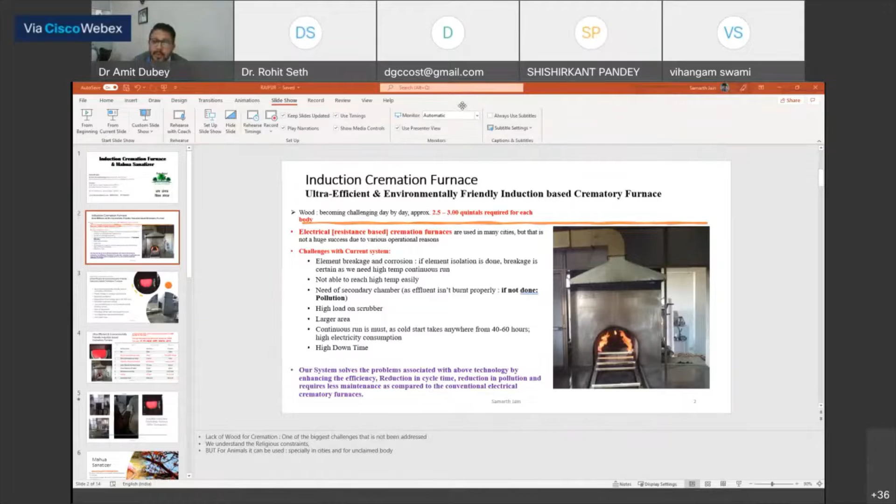Apart from that, as we know, Samarth has been instrumental in the time of COVID for development of his Mahua based sanitizer, which is one of the leading examples of a technology indigenously developed. I would welcome Mr. Samarth Jain and would love to hear his presentation. Please, over to you, Samarth, for a presentation on the work being carried out by your organization.

Thank you for participation also. You have to unmute yourself. Unmute yourself, Samarth. We cannot hear you. Unmute yourself. I guess now it's okay. Yes, now it is okay. Can you hear me loud and clear? Yeah. Can you see the screen? Is it fine? Yes, we can see the screen. Please carry on. Okay.

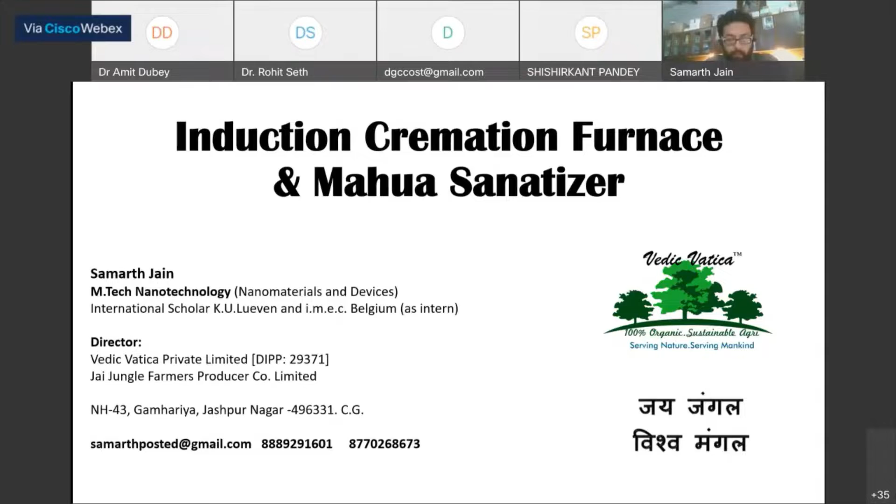So first of all, thank you, Dr. Amit, for giving me an opportunity to speak and present two of my works that I'm doing in Jashpur Nagar, Chhattisgarh. And my warm regards and good afternoon to all the scientists from the DST, State Council, and all the presenters. Basically, I'll be talking about the two projects that we are carrying out. One is specifically related to the minor forest produce, that's the Mahua, and second is the induction cremation furnaces. First, let me start with changing.

Well, about the induction cremation, we all know the wood is getting scarce day by day, and in fact, in our district of Jashpur also, out of 12 months, 3 to 4 months we need to bring wood for cremation from our nearby Ambikapur district. That's the harsh reality. And the alternate for this is the standard electrical resistance based cremation furnaces that we all know. As you can see in the screen, this type of furnace is being used to cremate the body. And it has been widely used, and specifically during the second wave, the government also promoted this, and many tenders were floated. Few were in Delhi, Agra, and 2 or 3 more places.

But as we are working very closely with heating systems and furnaces since the last 10, 12 years, that's my experience, and the team which we work with has experience of more than 30 years in the same. So we learned that there are a few major issues with the system that I would like to talk about first. Because when the body is being burned, be it human or animal, there are a lot of acids, bases, and other things that corrode the heating elements, because we are talking about the resistance-based element. At high temperature they are already vulnerable, and these types of chemicals are more reactive at temperatures of like 700, 800 degrees Celsius.

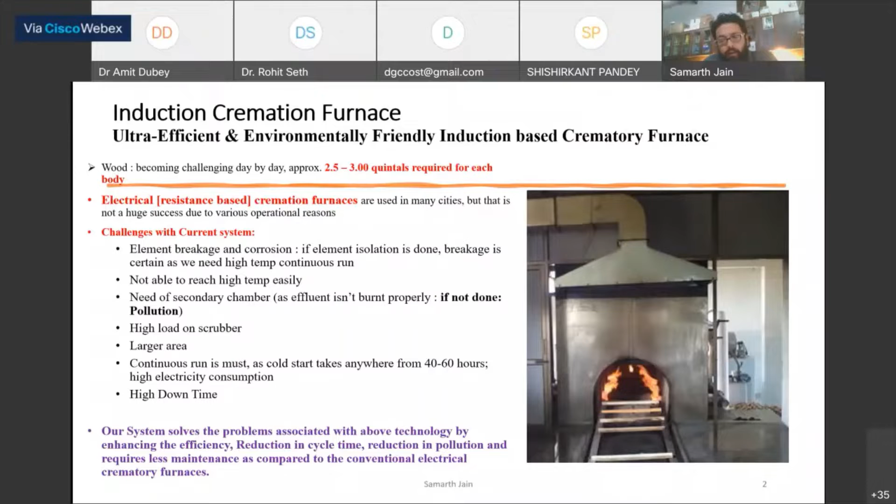So as you can see, in the resistance-based system the heaters are on the sides. If you can see the mouse pointer, usually heaters are on these sides, and it's being heated so that the temperature in the core area reaches like 800, 900 degrees. And you can see here there is very less insulation also.

And this is the steel chamber that we are using, and there is just a coupling of the induction system around it. So what we can sufficiently claim after testing around 200 plus cremations: this is the latest system that we are operating at Agra by Silhouette Rainbows. This is the induction-based system. Also, the size is very less, and I will give the comparative details in the next slide. So there is very high power saving, minimum pollution. It will be much easier if we see the comparative data.

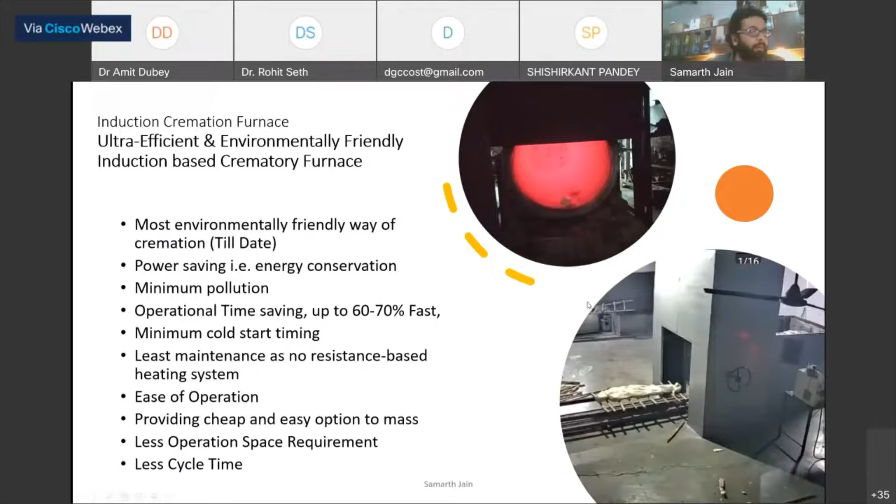So this is the data that we have achieved after 200 plus human body cremations at the test site located at Sri Kshetra Bajaja Committee, Tajganj, Agra, and all of the development work is being done at Silhouette Rainbows, Agra, and Vedic Vatika, Jashpur. So this is the comparison of heating mode. You can see the resistance-based system, and here is the induction-based system. The installed capacity in kilowatts required is higher, but energy consumption is reduced by more than 50%. Minimum, we used to get around 50 to 60 kilowatt for cremation per body, and here we are able to achieve that in 50%.

Also, the minimum time for resistance-based heating system cremation all over India is 2 to 3 hours, and ours is safely 1 hour. It's less than 1 hour, but for being on the safer side, we are saying 1 hour. Again, when we compare the cold start time to reach 800 degrees Celsius, resistance-based is 40 to 60 hours, and ours is maximum 3 hours, that too for 1100 degrees Celsius. When the body starts burning, the temperature automatically goes high. So after 800, you can simply put the body, and then it assists in increasing the temperature.

Again, the downtime is the most important thing, because if anything goes wrong with the system, the insulation is very good; we have to make the system so insulated that it keeps the heat for a longer duration of time. So for a resistance-based system, if something is wrong and you want to make any changes, it would take anywhere between 2 to 3 days so that the condition is workable inside the furnace. While in our system, it's only 3 hours. As you can see, there is a very thin layer of insulation, and then there are different gaps, and this is the whole system. I think I do have some images later on.

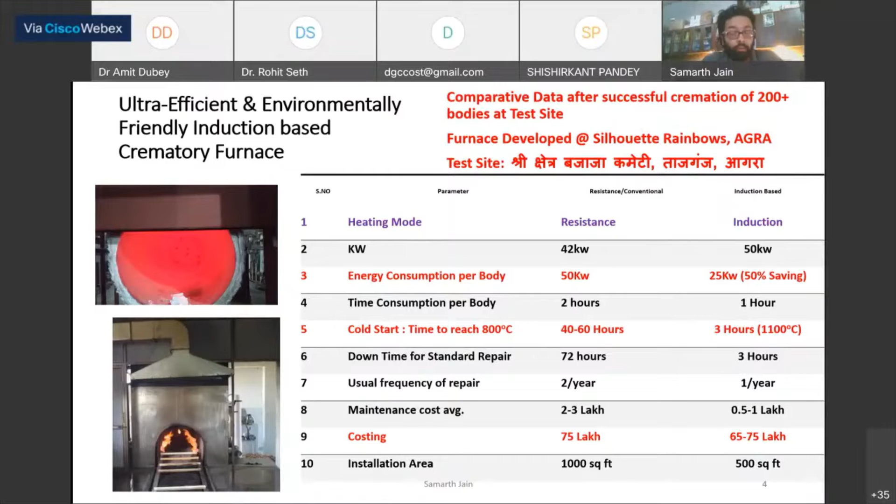So this is the main system that is running. You can see there is very less insulation. There are just 1 or 2 layers of insulating ceramics, that's all. This is the whole system. It's not very clear from this side, but this is our induction furnace, induction motor. This is our control panel. This is the chamber where we put in the body. This is a gate for closing, and you can see only one small pipe for passing off the effluent.

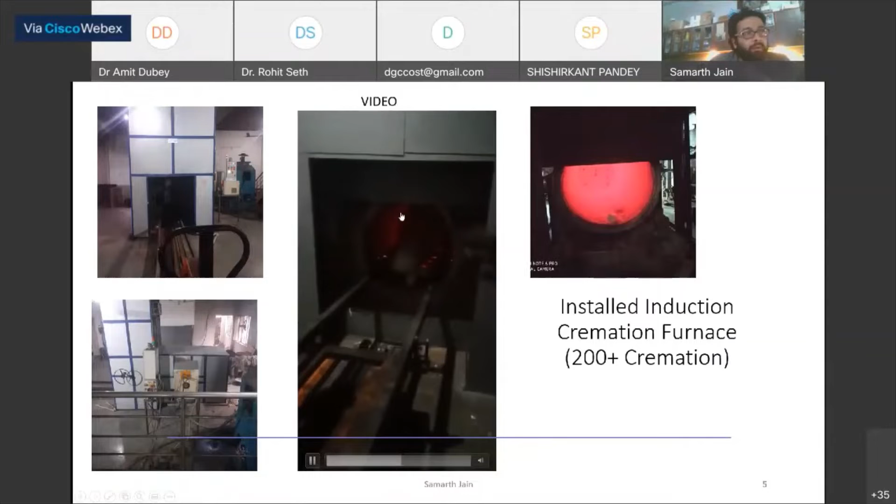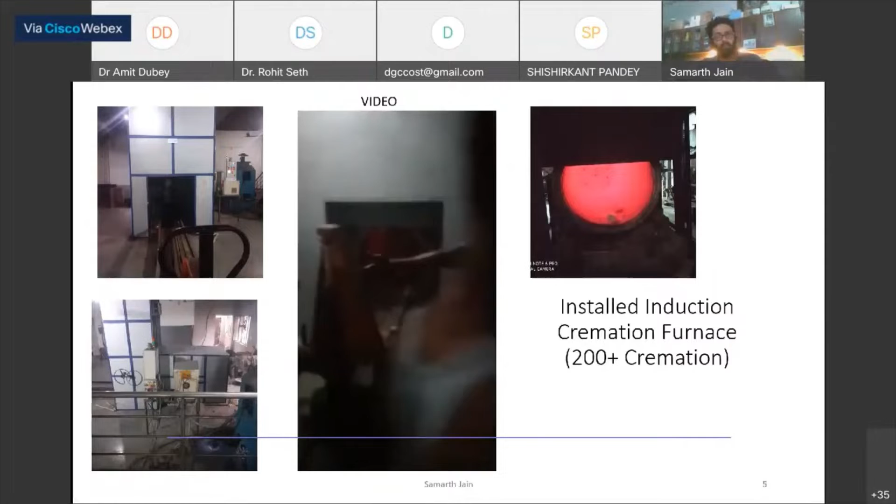The video is loading, but check if you can see. Yeah, this is one of the videos. You can see the red hot chamber, the glowing chamber that is made of stainless steel, and that assists us a lot, because we can achieve the temperature very easily in like 2 hours or so if we start from zero. So that's all specifically on the induction cremation system. If anyone has any questions, because I'm keeping it very short, I would be very happy to answer, or we can continue later on.

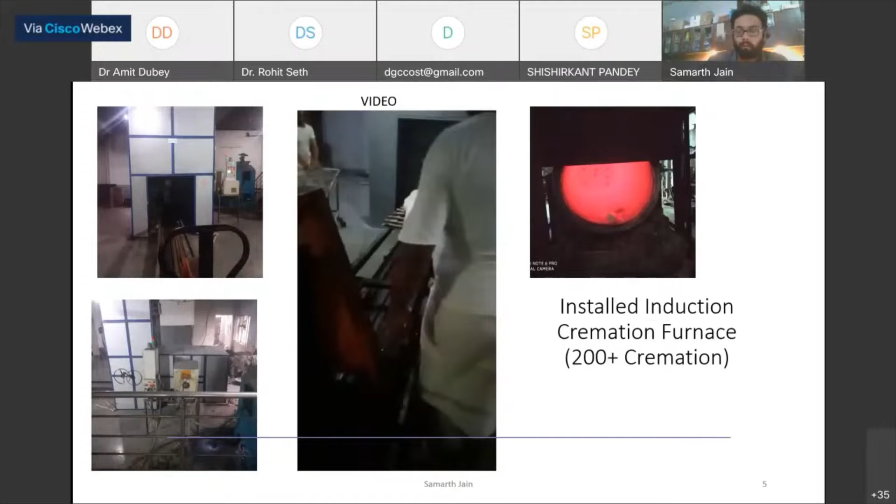Hello. Okay, so I will switch further.

Now coming to the work on the Mahua sanitizer that got a lot of hype, specifically in the time of Corona. Basically, I'm from the Jashpur region and it's too far away. The connectivity issues are a lot over here. There are no direct transports from any big cities, no railways, and no airports. So we are kind of secluded from the market chain. So there was an acute shortage of hand sanitizers. I'm also working as a free consultant with the Department of Forest, and sometimes we also work with the Van Dhan Kendra. So we came to know that there was a big issue of sanitizer, specifically for the police, CRPF and medical staff.

And also there were news coming of this sort that there is a skin disease happening, or cancer is spreading, by excessive use of isopropyl alcohol based sanitizers. And we all know from Ayurveda that Mahua is widely used to treat skin diseases, and the easily available material that I came across that has alcohol was Mahua, because it's being widely brewed and used by the local communities. So we thought of giving it a try at a very small lab that we have in

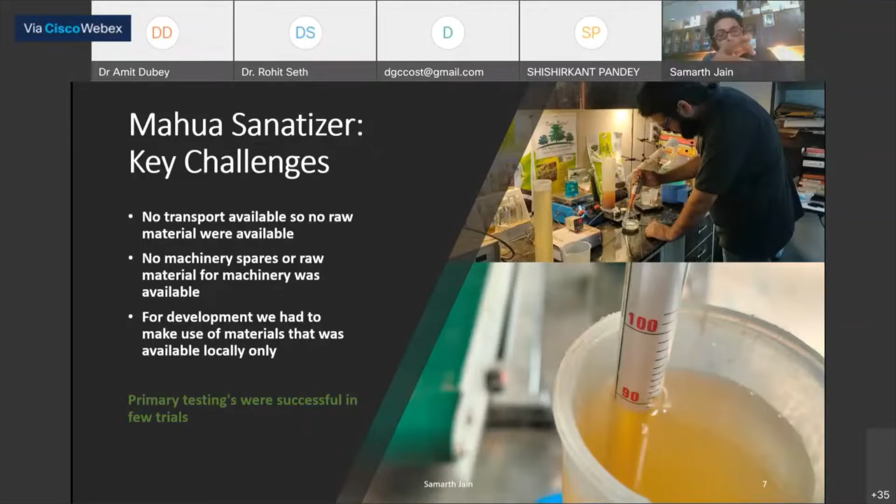our office. The main challenges, as we discussed, were that there was no transport material available, and no machine spares were available that we could purchase, because all the transports were down. And the best part about developing this sanitizer was that nothing from outside of our local town was used. As you can see, we were able to achieve easily 89-90% of the alcohol in our initial trials.

Again, after we were finalizing how the process flow will be and how we will run the system, another challenge that we faced was most of the labor that we have in our town was mostly uneducated, or they were from the tribal region. And another main issue was, because we were a private company, getting a license was a big issue. We cannot easily get the extraction license or excise license. Another issue was investment was required to build test systems.

So, because we were working closely with the DFO sir and the collector sir in our district, we had an unofficial agreement sort of thing that if it is being developed, they'll help and take over the system. In the images you can see, all these are the tribal women. She is filling the first batch of our sanitizer. This was the testing and training at our facility. And in the lower corner is the first system that we developed. It was of 80-liter capacity.

Yeah, so about the whole process, I will keep it brief, but basically what we do, the stock is fermented, that has Mahua, Ranu, Jaggery, and other indigenous

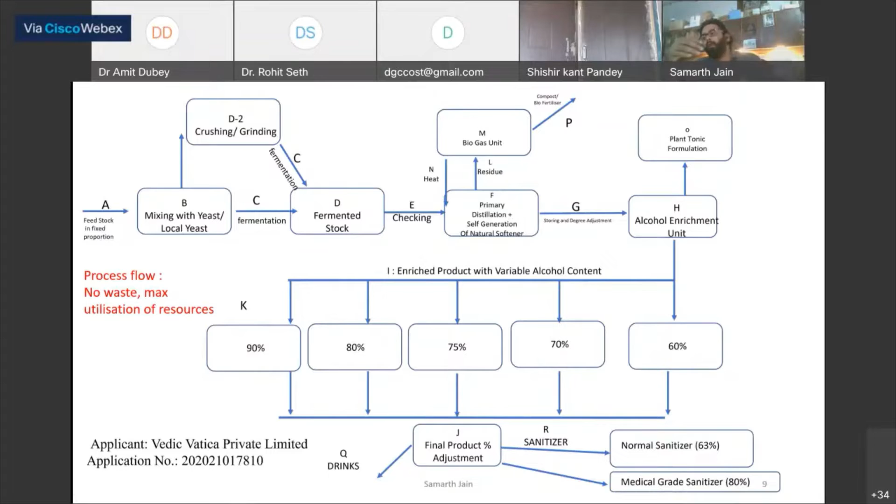We did get it checked from the food laboratories also, the residual after what is being fermented. Now, because after distillation, it's a very crude process, like desi technology it is. So there are different grades of alcohol that we achieve, I mean, the different refinement process of ethanol that we achieve in the system. That ranges anywhere from 20 degrees to the highest we were able to achieve, 40 degrees. So we need to enrich that. 20 is not enough for sanitizer, 40 is also not enough for sanitizer.

So this alcohol enrichment unit, what you see in the process H, was developed specifically by us for this purpose only. We feed in the material. There is a very short video I will share after this slide. So the primary distilled alcohol goes into the enrichment unit, and then it enriches it further. And the output we receive is starting from 90 degrees, it goes to 80, 75, 70, 60% of alcohol. So we store them in different containers, and then we adjust finally.

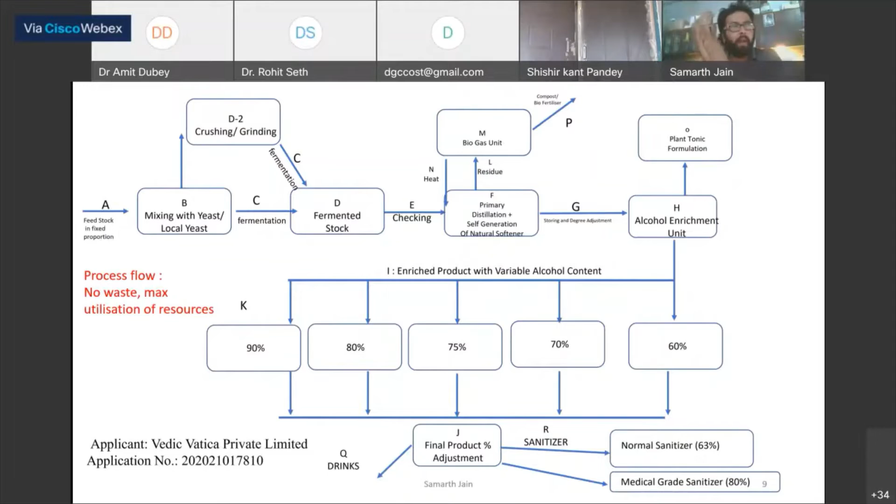Suppose if we have to get alcohol of around 70 degrees, what we'll do is we'll mix 60 and 80 or 60 and 90, and if the alcohol percentage is very less, around 40, we again put that back in the alcohol enrichment unit. Now the residue, I mean the waste that is removed from an alcohol enrichment unit, has around 5 to 10% of ethanol.

Although that can be used for making drinkables like RTDs, because we were using iron containers and those things, it was not feasible for us to achieve the license, so we tried to experiment with a plant tonic formulation, and it works very well for plant growth, specifically it assists in flowering. We have applied for the patent. For some reason, it was not considered novel, so it was rejected. But we have again applied for review. Some auditor from the electrical department is reviewing that also. I don't know why they have put it in the electrical department, but okay.

So normal sanitizer, what the US says, has 60 to 63% ethanol, but now the Government of India has increased it to 80%, and for medical grade it's somewhere around 80 to 95%. So we can easily achieve that using Mahua, and no other input materials are required from any big chemical factories or things like that.

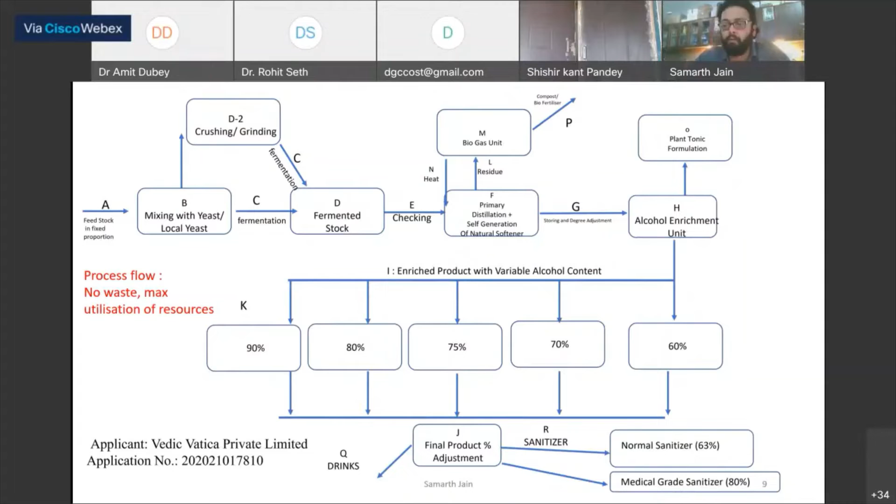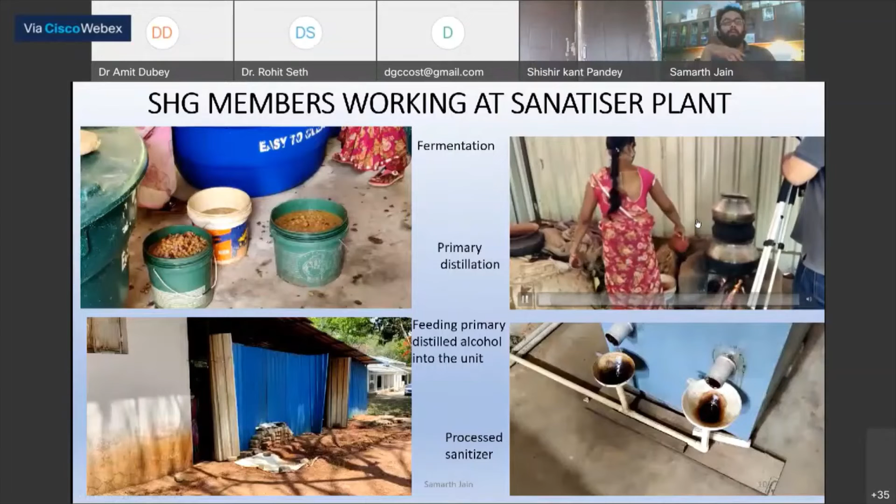This is the primary distillation where they use the traditional method. The essential oil is also being extracted by us using this method only, because we didn't have any different setup for that. You can see this part is empty now. There is a pot in which there is a secondary pot, and the pot is empty from behind.

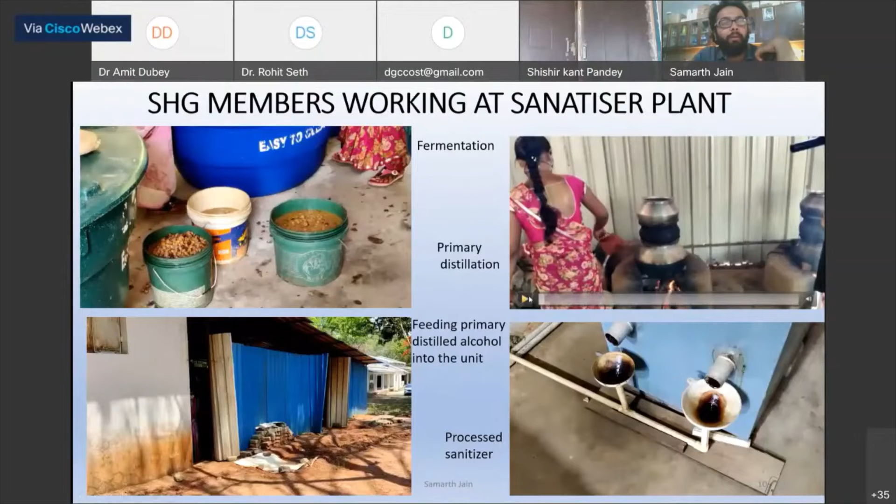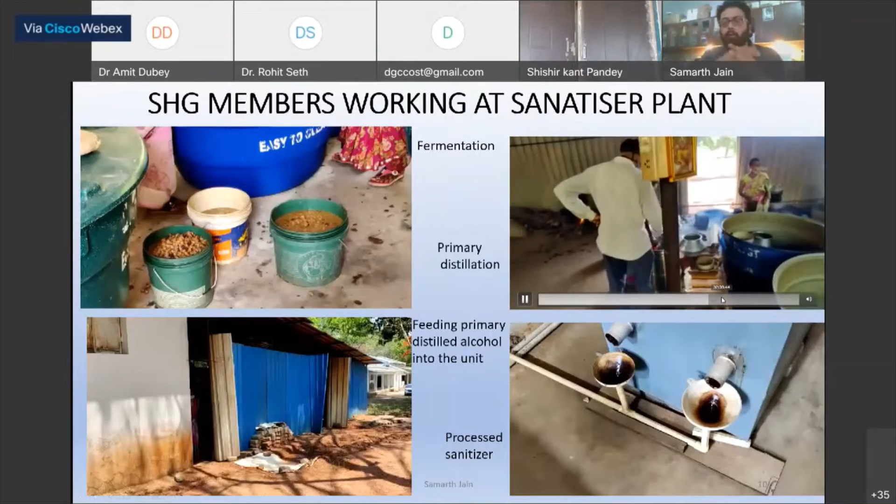So what happens is when you heat the system, the alcohol evaporates. Let me show you. There is another utensil that has cold water filled in. So when alcohol or any other vapor gets in touch with this, it acts as a cooling agent, and it drops into this pot. It's been used since ages. There's nothing new, but we try to keep it the same way so that we can give employment to maximum people.

Yeah, this is how villagers usually check how strong the alcohol or the mahua they have brewed is. If it's a blue flame with very little yellow flame and it burns off completely, the alcohol is good. So that's how we kept the system. But before feeding into the machinery, we did check with the alcohol meter. Maybe in this one we can see.

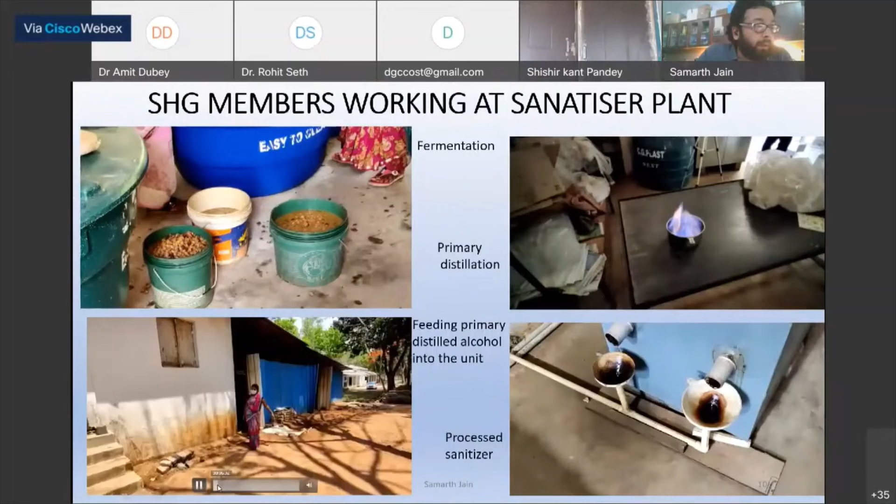Yeah, the material is being transported from the primary distillation hub, and now they are checking how much alcohol it contains. And after this, it's being fed into the tank. This tank has been joined with our larger system of 700 liter capacity.

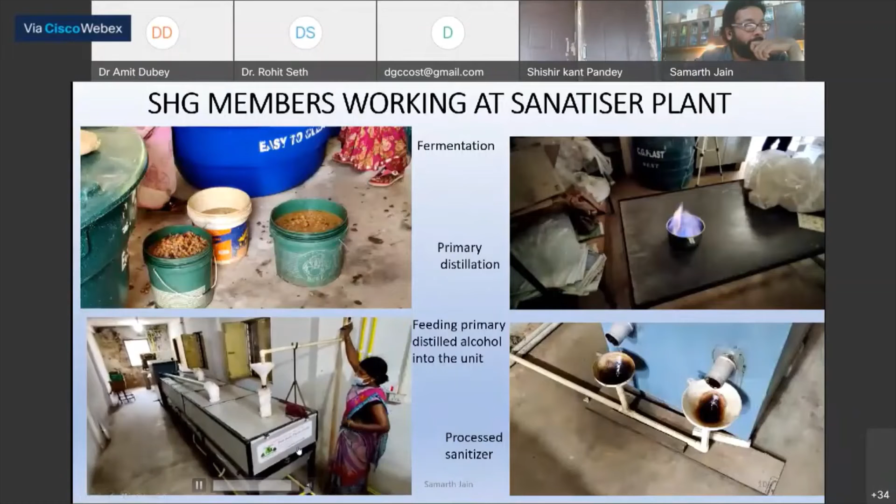You can see the pipeline. She will be feeding the material in. In this way, we were also able to minimize the risk associated with the high temperature furnace and the alcohol that has been kept. So we have kept the distance as far as possible. This is the loading part now.

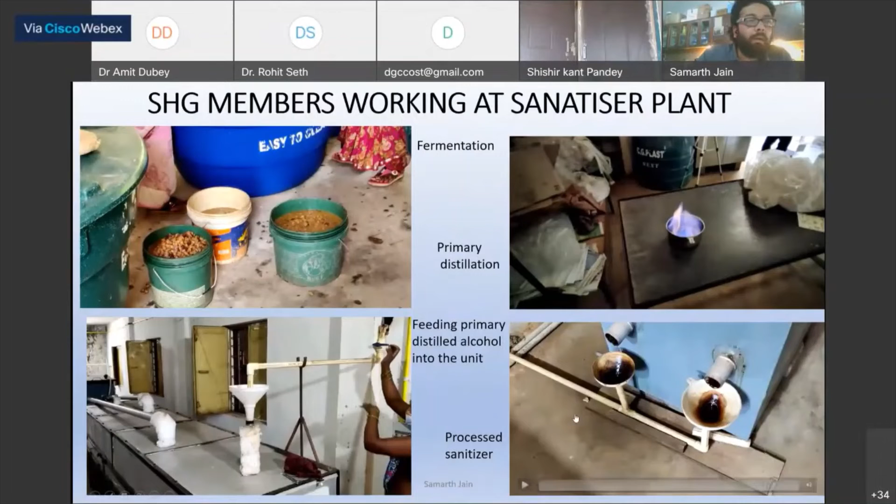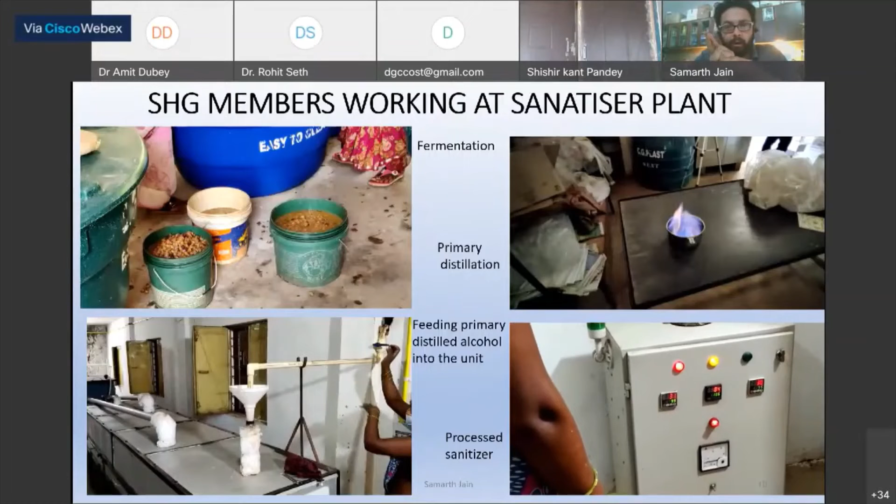So Mahua was fed in here, the primary distillation system. This is our control panel. When we start the system, there are heating pads all below the system and also on the corners, so it heats up the system. The best part is that our heat loss control efficiency is very high. So even if the system is around 100, 110, you can easily touch the system and stand by the side. There is no issue with that.

Once it's heated, the vapor flows from these two big pipes you can see. This is the chamber, these two pipes. This is the condensation chamber, which has the water and coolant in it. And here we can see the high degree percentage alcohol coming up. Again, because there was risk, we put the system in such a way that the alcohol being generated is shifted to another room.

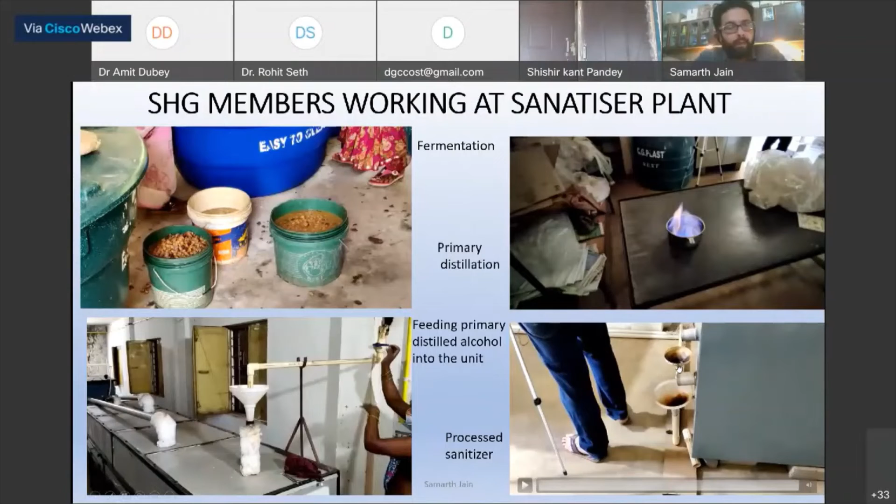So this is the whole team that operates the system, does the packaging and sells it to the government. The sanitizer is being sold by the trade name of Chhattisgarh Herbal, and they are also proud members of the Jai Jungle Farmers Producer Company that we have formed very recently, and we are working on various other products like that.

So a few achievements, keeping it short: no chemicals were used, everything natural is used. The most innovative part was that every sanitizer you must have seen has to use either glycol or glycerin or aloe vera for keeping the hands soft. Because Mahua has an inherent property for skin conditioning, even the alcohol that we obtained from Mahua had a sort of natural glycol, so we don't have to use a softener, even in Mahua sanitizer with an alcohol content of around 90 degrees. So that was one of the good things.

Another is there is no wastage. Everything is being used. Our system is so easy that among all these women, only two of them can read and write easily, the Adhyaksha and the Sachiv. Other than that, they can't even write, but they are manufacturing this. Till date, and this is data of 4 months back, they have achieved a turnover of 60 lakh plus.

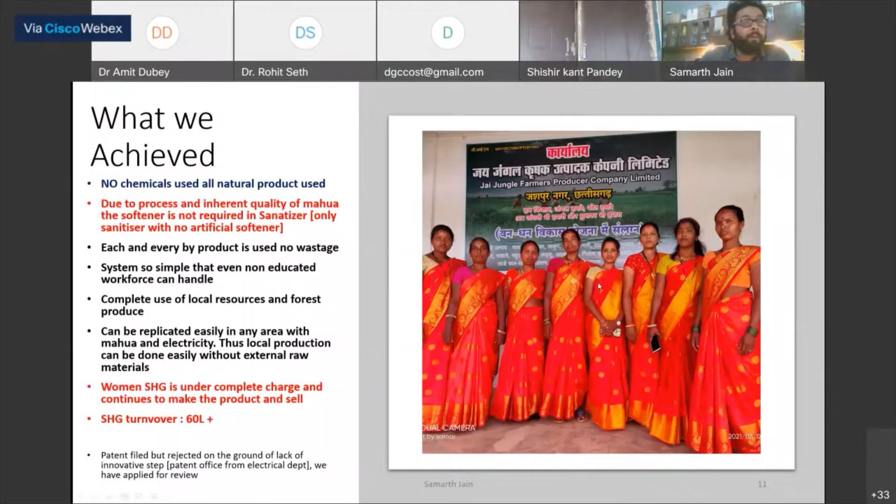Other than this, we also work on a few standard technologies where no innovation is involved, but we are developing them for SDGs, like these completely plastic-based bricks. You can see they are very strong, plastic and sand. The major issue with plastic is that recycling centers are not available for the thin plastics we use, like for chips, Kurkure, Lays, etc. So they are not even being purchased by the middleman traders. So we have developed this one.

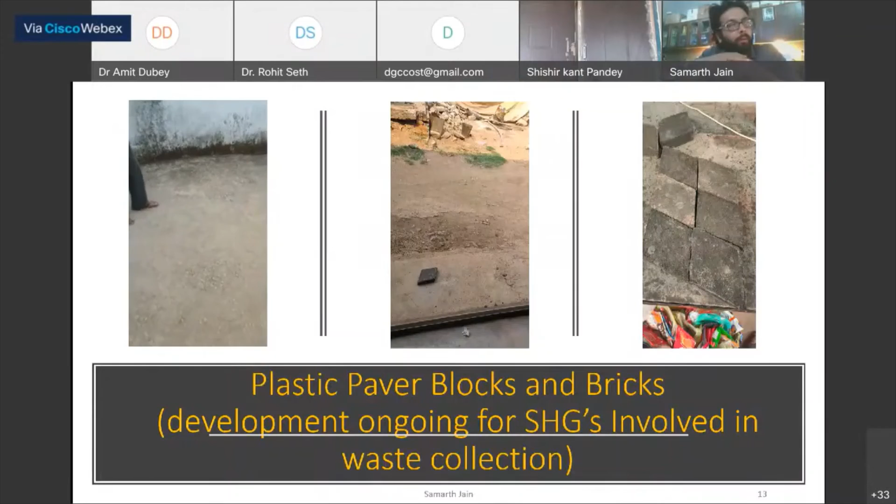There are also tiles, which you can see are very high strength. And again, the system is so easy that many villagers can work on it. We are trying to integrate this with the Van Dhan centers, if possible, or Gauthans. These are a few of the tiles that we made.